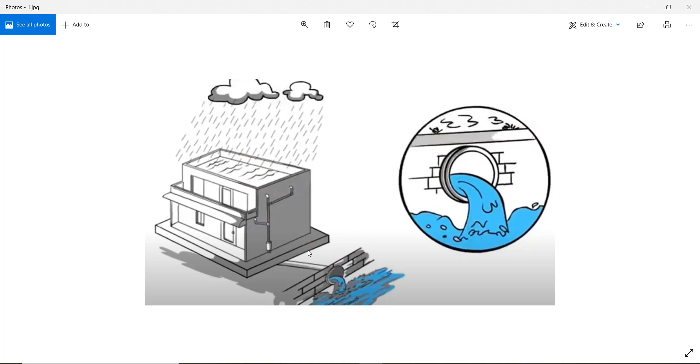So let's discuss what rainwater harvesting is. It's nothing but this - usually when rain comes, the water which falls on the top of the roof of a house and also on the surrounding portion usually goes to the sewage, and that pure rainwater falling on our land is basically wasted. So in this day and age, it's high time we provide rainwater harvesting, that is, to harvest this rainwater for our beneficial purpose.

So what we are going to do is collect this rainwater and not let it go to the sewage. Instead, we'll route this rainwater from on top through a pipe to our filter and to our well. We'll be converting that well into a rainwater harvesting system by providing a filter bed around the well so that water can be filtered downwards.

This rainwater will recharge our groundwater table level. That is basically what is happening - the rainwater is recharging the groundwater of our plot. Instead of this rainwater going to the gutter and getting wasted, we'll be collecting it and recharging our ground level, so that during the rainy season the water table is recharged, and we can use that water in the non-rainy summer season also.

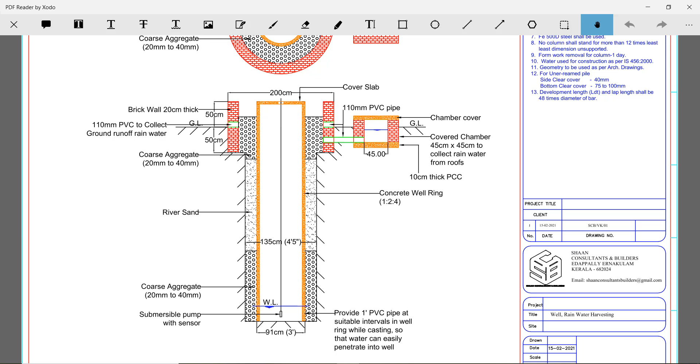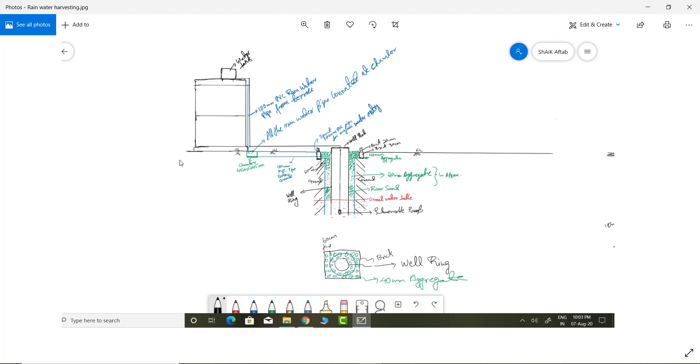So without any further ado, let's start our discussion. First, the rainwater from our home will be routed through a pipe to the chamber, as you can see here. This chamber will have a dimension of around 45 by 45 centimeters. The water from the rooftop will be collected in this chamber, and from there it can flow to the filtration medium. Next, let's talk about how the filtration medium is set up.

Normally, in a general water filtration medium, fine sand will be on top and below that will be the coarse aggregate. This is done because most of the minute filtration is done by the sand medium, so after that, when the water flows to the coarser medium, the flow of water we get out of this medium will be high. This is the purpose required in usual filtration of water.

But in this rainwater harvesting scenario, what we need is that the water coming during the rainy season should get into this medium at a faster pace. That is why we are putting a coarser medium on top, and the sand, the fine filtration medium, on the bottom. So the water coming during the rain will get quickly discharged into this filtration medium.

Another benefit of this is that since we've put a coarser medium on top, minute impurities will not be filtered by this medium, and the water can easily pass through. This top coarser aggregate filtration medium will not get clogged that easily, because a fine filtration medium gets clogged very fast, since the pores through which water can flow are very minute.

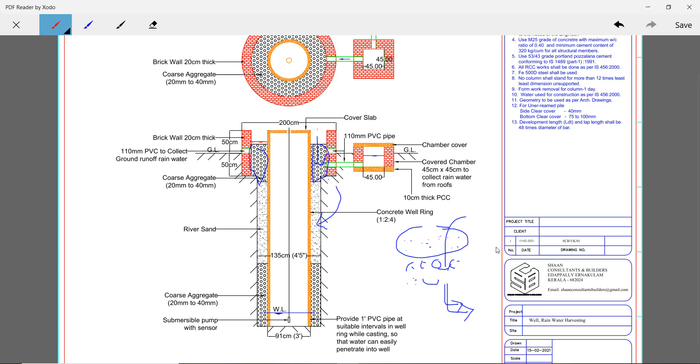Thus, we can prevent frequent cleaning of this filtration medium. One more thing you can do is place a net on top of this filtration medium so that bigger impurities like leaves and such can be cleared off very easily.

One more thing we have done in this filtration medium is put a coarser medium at the bottom portion of our well. This coarse medium placed at the bottom of the well is to provide an uninterrupted flow of groundwater into the well, because when we dig a well, in the top portion you will see there is no water coming into the well.

So as we approach the bottom of the well, the water streams from the ground will be coming into the well. When these water streams flow in, we provide a coarse medium so that water can easily flow into the well. Or else, if you provide a fine medium here, over a long run, the flow of water into the well can reduce.

Another thing we have done is that while casting the well ring, we provide some 1 inch PVC pipes in the bottom portion of the well rings. This will also help enable the streams of water from the ground to flow into the well uninterrupted.

Next, about the length or depth up to which we should provide this coarse aggregate filtration, then sand filtration, then again coarse aggregate - it all depends upon the site on which we are constructing our well.

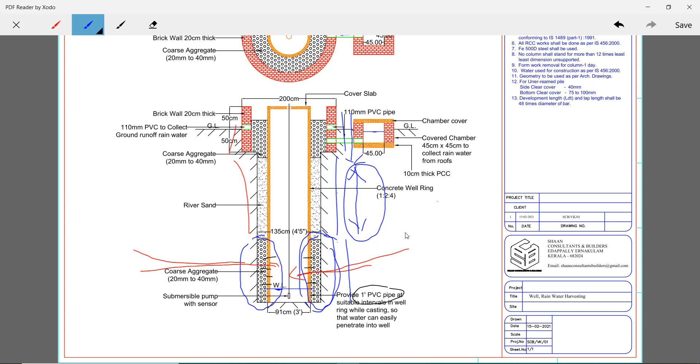As a thumb rule, you can provide approximately 1 meter of coarse filtration medium, and most of the rest of the well can be sand, because this is the portion where most of the fine filtration takes place. Then at the bottom we can provide the coarse medium - when digging the well, once you see water from the ground coming into the well, from that portion you can provide this coarse medium.

Next, another important thing you have to take care of is that you should always cover your well on top. Our forefathers used to say you should not cover the well and the well water should be exposed to sunlight, but this is not scientifically true.

In the olden days, there was no issue of maintaining the purity of water, because we used to take water from the well with the help of a cup and a rope. So the water used to get shaken when we took it, and in that process aeration of the water took place.

But nowadays, as we don't use that method, we just take water from the well with the help of a pump. So the water is not shaken up, and proper aeration of water doesn't take place.

If stagnant water is exposed to sunlight, fungal growth and other small insects will develop in the water, which will ruin its quality. So that is the purpose - it is always wise to cover the top of our well.

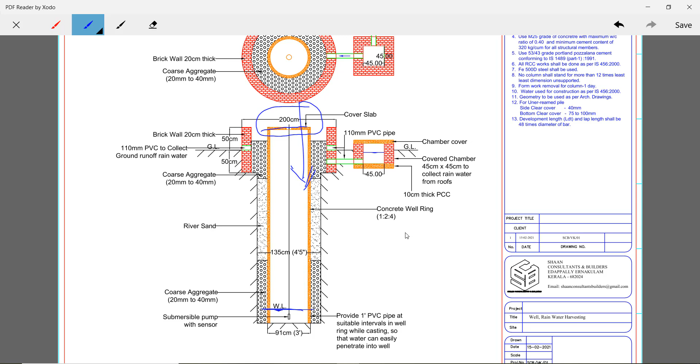Next, what we have done is provide a submersible pump with a sensor. I will explain the purpose with two cases. First, let us take this as our water tank in the first case, and this as our water tank in the second case.

In the first case, we will pump water into our tank only when the water reduces to the bare minimum. In the second case, we provide a sensor, and as soon as the water reduces to a certain level - much less than in the first case - the sensor gets activated and water is pumped.

Suppose the storage capacity of this tank is 1,000 liters in both cases. In case one, we'll need to pump 1,000 liters in a single go. In case two, we'll only need to pump about 100 liters in a single go to top up the tank.

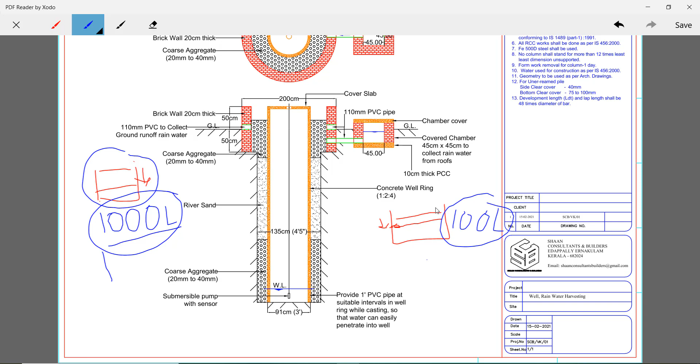So we are taking 1,000 liters of water from this well into the tank. If the water available in this well is only approximately 1,000 liters, the well's water will be completely finished off when we pump it in a single go.

But in the second case, as we require only 100 liters in a single go, the water will be pumped and still approximately 900 liters will remain in the well. So at any given point, sufficient water will be available in the well, with no shortage in our water tank.

Before the next 100 liters needs to be pumped into the tank, that 100 liters will be replenished into the well from groundwater, since it takes time for the well water to be replenished. If the rate of groundwater flow into the well is very low, this second case gives sufficient time for the water to replenish.

That is why we are providing a submersible sensor pump. This will be very helpful in situations where the groundwater table is low, or the flow of water into the well is very slow.

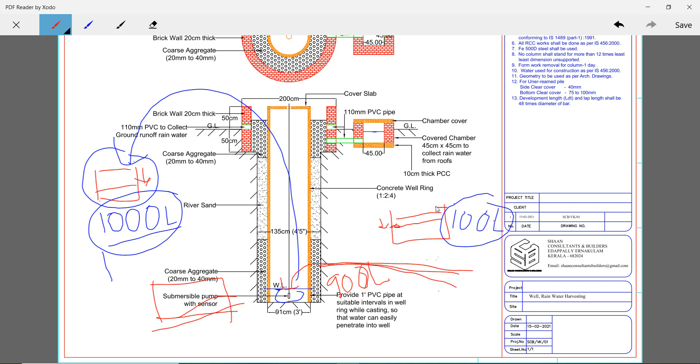Another benefit is that with a sensor pump, we don't need to switch it on and off manually as the water finishes up in the tank. It will just keep topping up our water tank frequently, so we don't have to bother about it. I think it's very efficient to provide a submersible sensor pump.